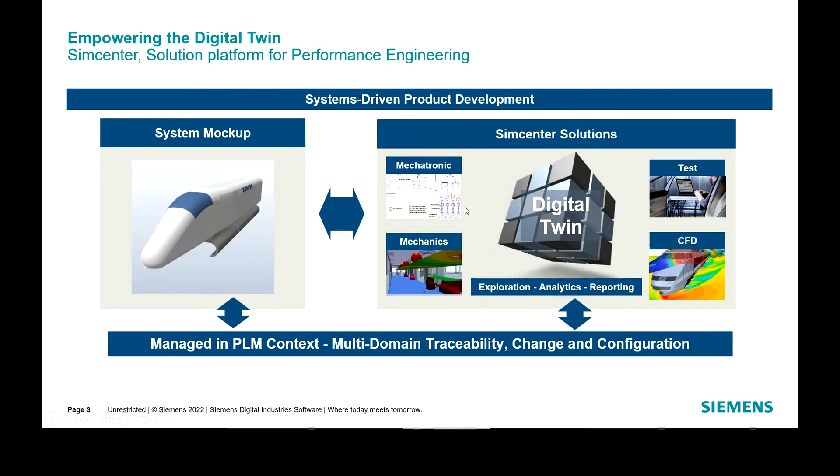But again, today we are going to talk about mechatronic system simulation with our main tool called Simcenter Amesim. Simcenter Amesim is an integrated system simulation solution which allows engineers to simulate and optimize mechatronic system performance. It consists of ready-to-use multi-domain physical libraries, but also industry-oriented libraries, and I will show you some of them today. Some are dedicated to transmission and vehicle dynamics, which will be used today, or batteries and electric machines for the webinar next week, and a dedicated library for heating, ventilating, and air conditioning systems, which is the purpose of the webinar in two weeks.

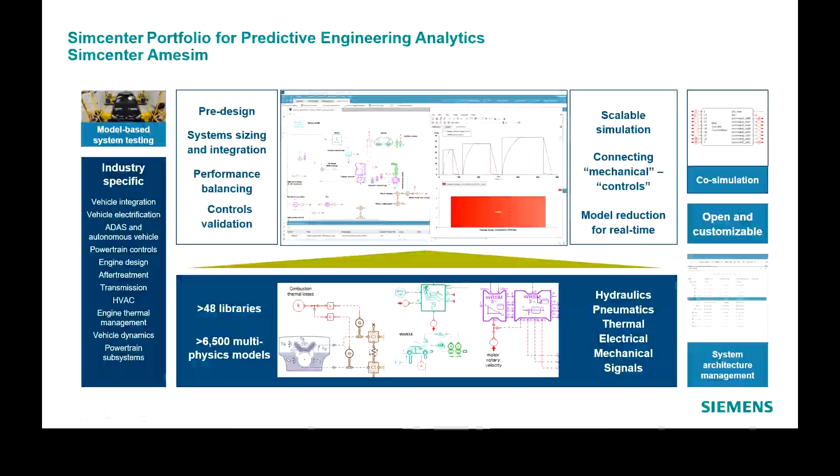So Amesim is an open environment that can be integrated into enterprise processes and can be coupled with major CAE tools and control software packages, can interoperate with functional mockup, and be connected with other Simcenter solutions. Again, today the focus will be on mechanical simulation, and I would like to use some user applications on pantograph simulation, braking and suspension simulation, and the mechanical dynamic driveline. The presentation will be based on customer case presentations as well as live demos.

So let's start with the first topic: braking, suspension, and also pantograph. System simulation can support the design of these systems by supporting the evaluation of static but mainly dynamic performance of the braking system, the suspension system, the pantograph system. It allows you to evaluate new architectures at a pre-design stage and identify potential gains, what-if analysis, so considering a certain technology of system and changing the sizing of the different components to check the impact on the dynamic performance of the system, and at the same time on its energy consumption, which can sometimes be of interest. Typically for the braking system, of course, a compressor is needed to generate the compressed air required for braking, and it has a power consumption.

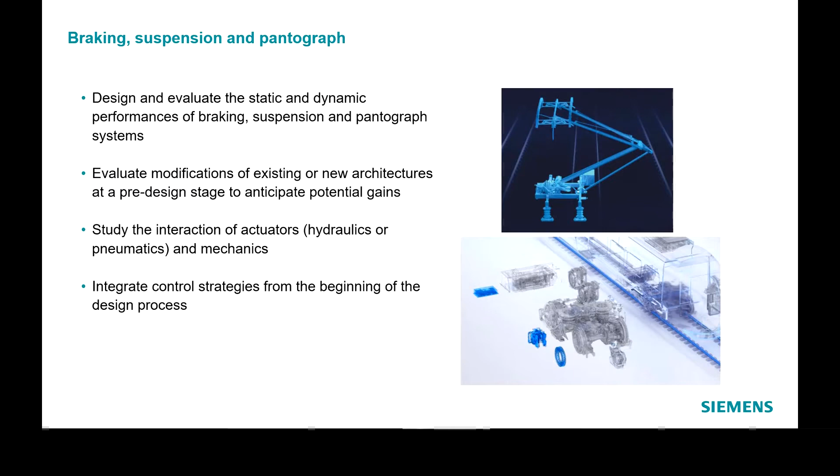What is very important is to have a tool to study the interaction between the different actuators, which can be hydraulic or pneumatic, and the mechanical structure. Most of the time the system is closed loop controlled, and the objective is to provide a simulation platform to couple with control strategies to validate them upfront. We'll show you an example on the pantograph.

Let me start with an application example of Wabtec Faiveley Transports with Amesim on a pneumatic braking system for train. As you can see in the reference, Wabtec Faiveley started many years ago with pneumatic braking system simulation using our tool.

The interest is to compute and assess the braking transient of building the pressure inside the system to brake the train. To have the complete time response of the system from the command to the braking, it's important to simulate the different elements and components of the braking system.

We start not from the compressor, because the main pipe already has 9 bar of pressure inside, but then we have all the pressure reducing valves, the auxiliary tanks, the braking cylinder, and of course the main braking valve, which is presented in the next slide.

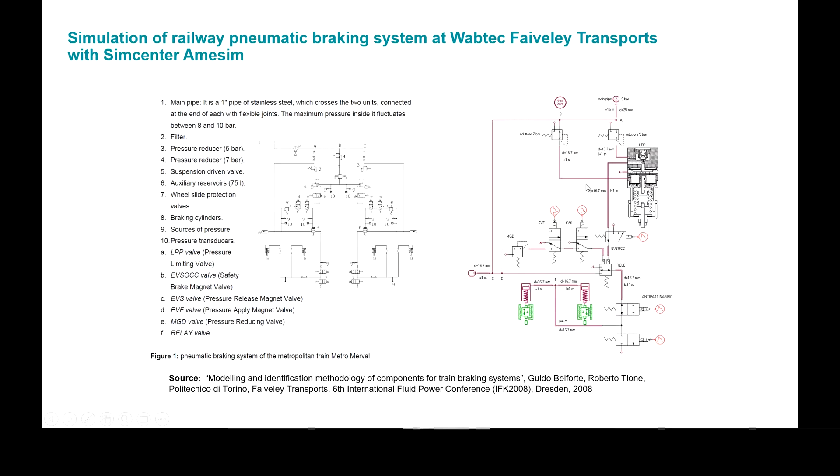Here is the schematic of the pneumatic braking system, and here the associated Amesim model. This Amesim model is created using a specific library called pneumatic component design, which allows entering into the detail of the geometry and technology of each pneumatic component.

Here it's a relay valve, for example, which allows setting the pressure target in the system as a function of a pressure command. In this system you have moving parts: springs, volumes, and valves which open and close depending on the displacement of the moving parts.

All this system is represented here using unitary elements, which represent the valve, the piston, the membrane, the spring. This approach allows modeling and simulating any kind of fluid component. In this case it's pneumatic, but it can also be hydraulic.

As you can see here, we have the model of the pneumatic valve, with validation against experiments.

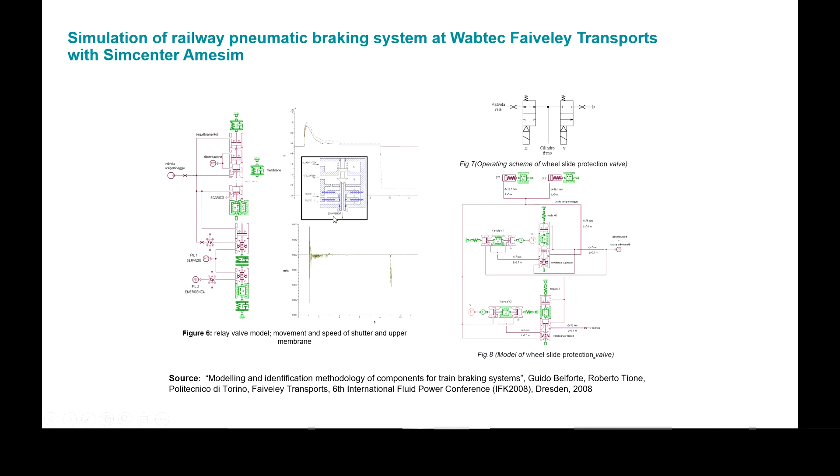The objective of the simulation is to simulate, for in-service and emergency conditions, the time required to generate the pressure inside the system. This time transient is what we want to capture with the simulation model, to estimate how it will be impacted by the sizing of the components or the operating conditions.

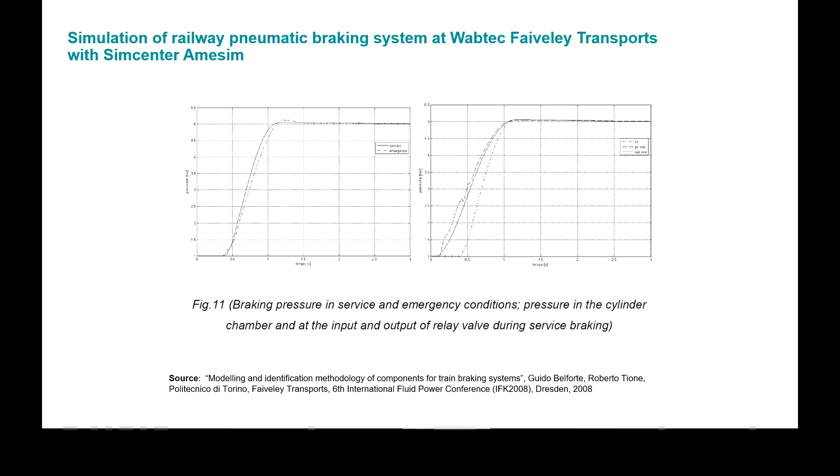Well, that was the first example I wanted to show you. A second example here is on a suspension system for a bogie.

With Amesim we have the possibility to represent the damping system, the vertical suspension and damper. Usually this damping is done using a hydraulic cylinder with various chambers, and this paper proposes an innovative system where the movement of the suspension up and down can be damped.

Instead of losing the energy by damping inside an orifice, this up and down movement can be coupled to a hydraulic motor connected to an electric generator to generate electrical current. That's the objective of the research project here. I can share the paper later if you're interested.

It couples the hydraulic damper with an electrical generator. The Amesim model allows estimating the electrical current generated by this system, given that the system has to be damped — the main function of the suspension is to damp oscillations, and the secondary mission is to also generate some electricity.

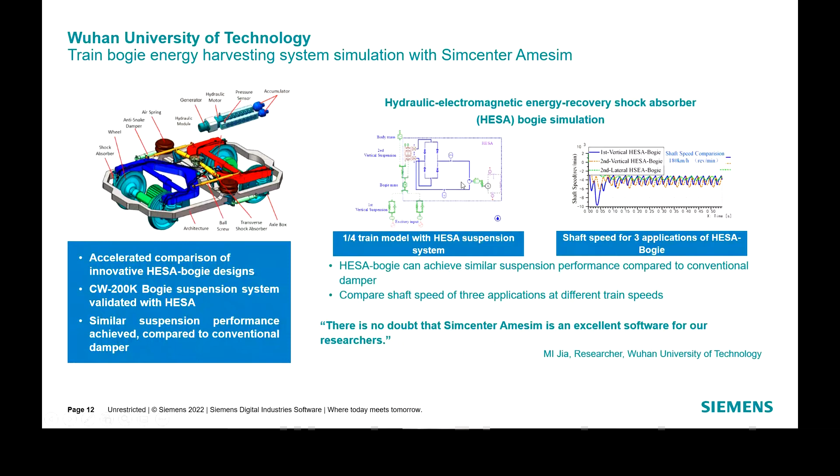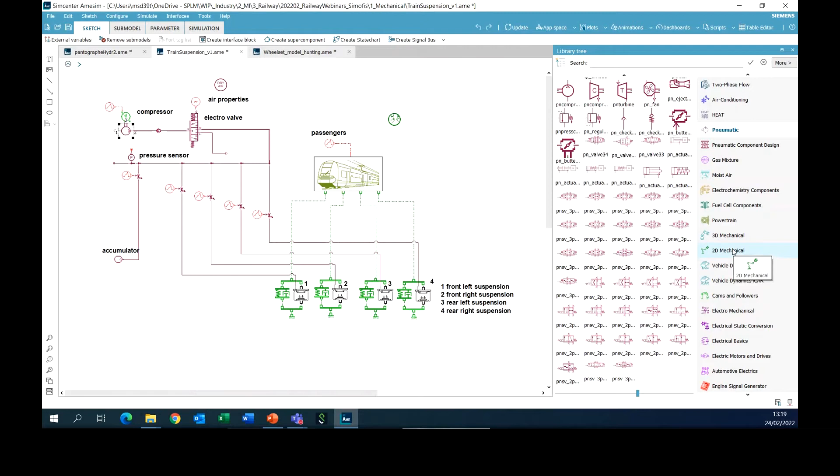And we have used in this example a compressor element, a check valve, an electro valve, and also additional valves to put some compressed air inside the suspension. And here the suspension and the train or the locomotive is represented using mechanical simulation, which is also part of Amesim, in which we have the possibility to simulate either 1D motion, 2D motion, or 3D motion. In that case, its elements are part of the 2D mechanical library. We consider only a 2D motion of the train.

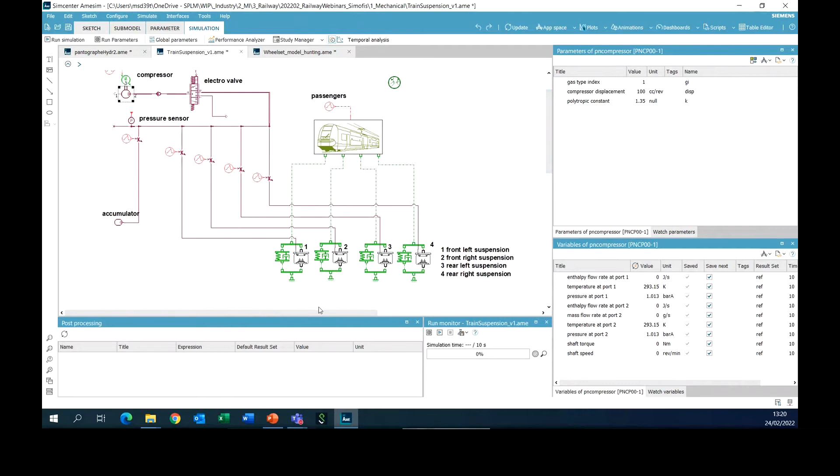Okay, so what is the scenario we want to simulate here? The suspension you see on the four wheels is based on a classical spring. But we also add a pneumatic spring, which allows to compensate the additional weight you have in the train when you have passengers going up and down and going in and out. This pneumatic suspension allows to maintain the height of the train relatively stable.

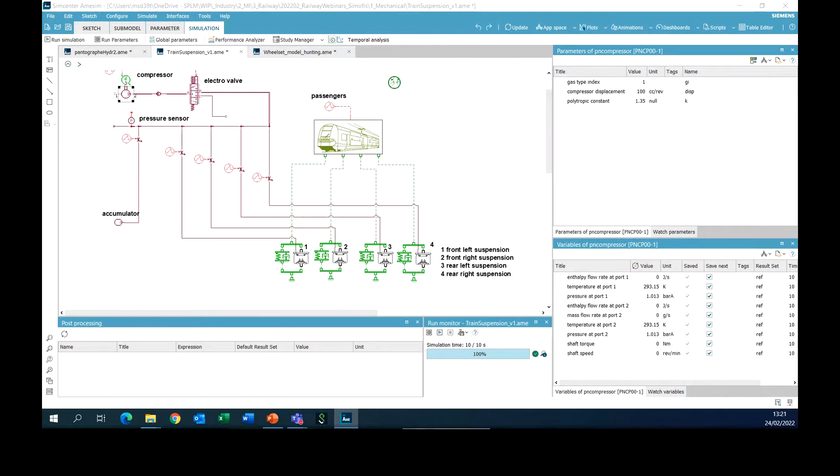So if we look at the simulation, let me run the system. It's very fast because it's the objective of system simulation, and in that case the model is a first level of model with not a lot of parameters and dynamics inside. What are we simulating here? We are simulating the fact that after, let's say, 3 seconds of simulation, we add something like 1 ton and 600 kilograms, let's say roughly 20 people inside the train. And of course, due to this additional weight, the springs here are compressed, and you have a displacement of 10 millimeters of the body of the train.

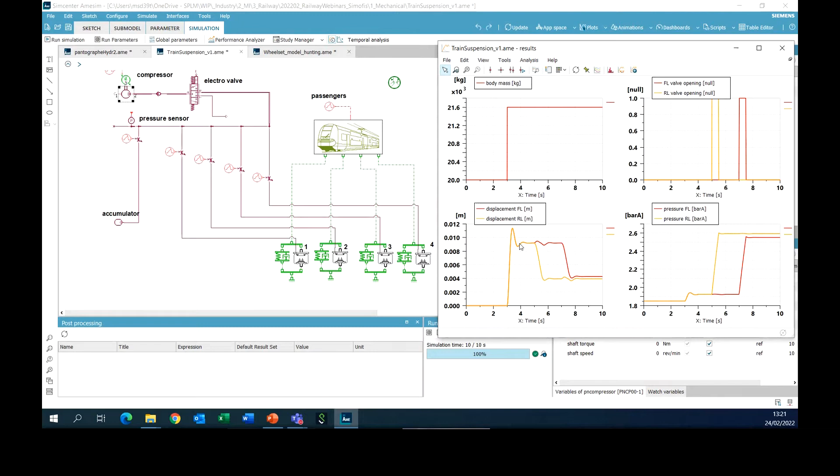Trying to compensate this displacement, we can put some compressed air inside the chambers. So what we do here typically is, with the yellow curve here, we open the valve to put pressure inside the rear left wheel, and as a consequence, the pressure increases in the rear left wheel, and the train lifts a little bit to compensate the additional weight we have in the train. And the same after 7 seconds, we put pressure in the front wheels, in the front suspensions, and we have the same characteristic.

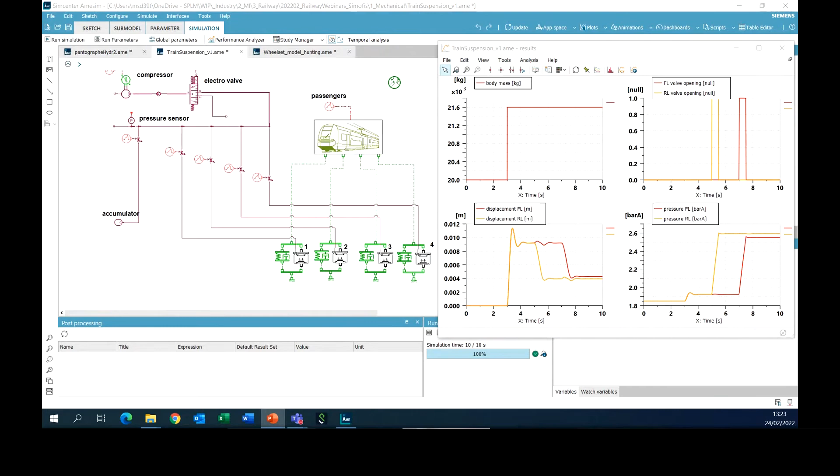So that's an example of what can be done using Amesim, typically to size the different elements of the system, but also to test some control strategies. Okay, that was the first example. Then we come back to the presentation. Oops.

Yeah, here. The second example is on a pantograph. The example I am showing you here is the result of a research project done by an Italian university, again some years ago, so as to prove that our technology is very mature and used for many years in the industry. So here it's an example of active suspension. The objective here is to control the actuator damper in order to maintain a contact force as constant as possible, because when the train is riding, you have the wires which are not at the same height, and then the system has to compensate this height and maintain the same constant force on the wire.

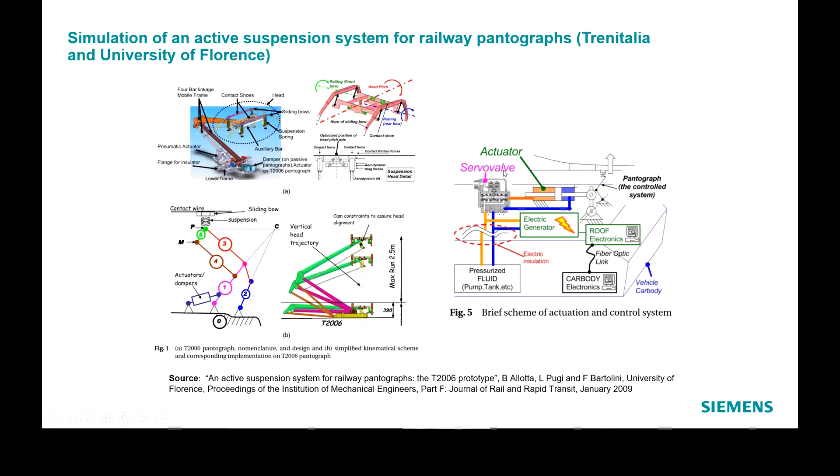Okay, so in this research activity, they developed a control system based on a hydraulic actuator and a Moog servo valve. They wanted to control it in order to maintain the contact force. And here it's part of the model on the hydraulic side, so the hydraulic servo valve and the hydraulic piston. Then the pressure signal and the force signal are used in order to develop the control strategies. And all the motivation of the paper is to explain the control strategy which has been developed.

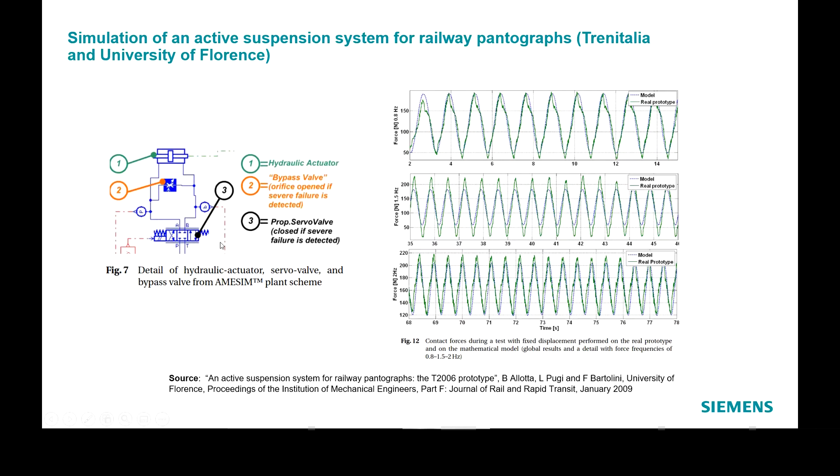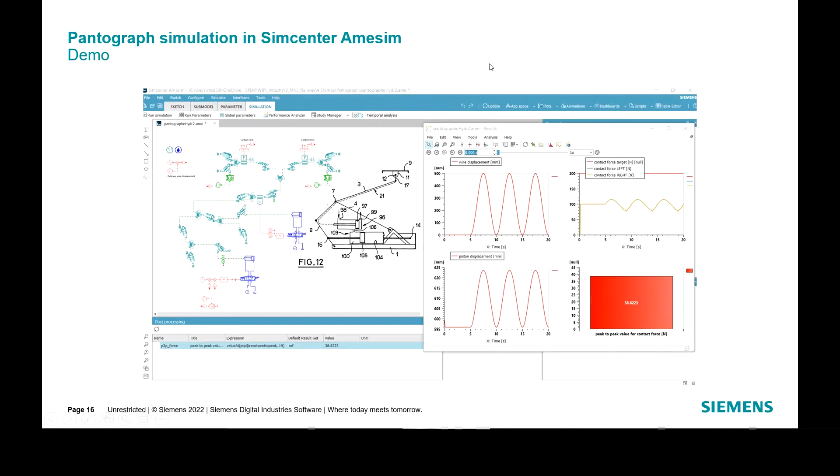Okay. So again, it's another example of usage of Amesim for pantograph design. And let's say, starting from this paper, we have tried to create on our own a simulation model which represents more or less what has been done by this university. So let me go now to Amesim again. We can close this one.

Okay. So here, you recognize the same icon as in the paper. So there are icons included in the hydraulic library, which are more or less the same kind of elements as you can find already in the pneumatic one. And here the mechanism has been created using the 3D mechanical library.

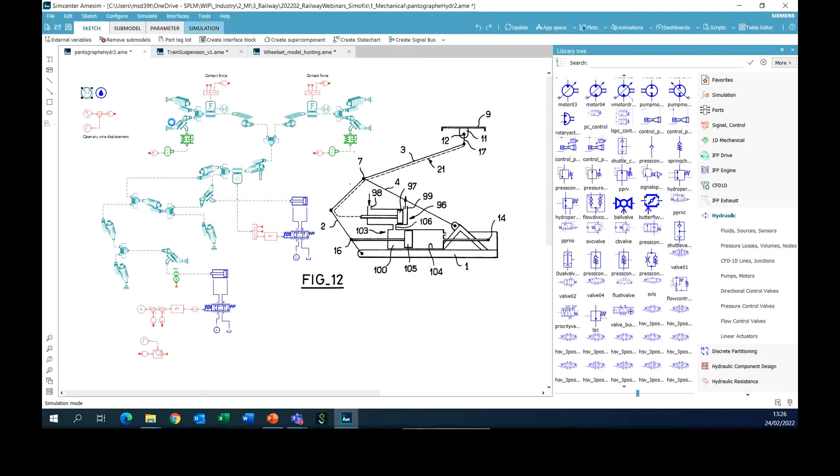And of course, in that case, the model can be created manually, or it can be generated automatically starting from CAD. There is some documentation inside Amesim explaining the process of generating a 3D mechanical model starting from the CAD. But of course, once the model is created, we also have access to an animation. In our case, the animation here.

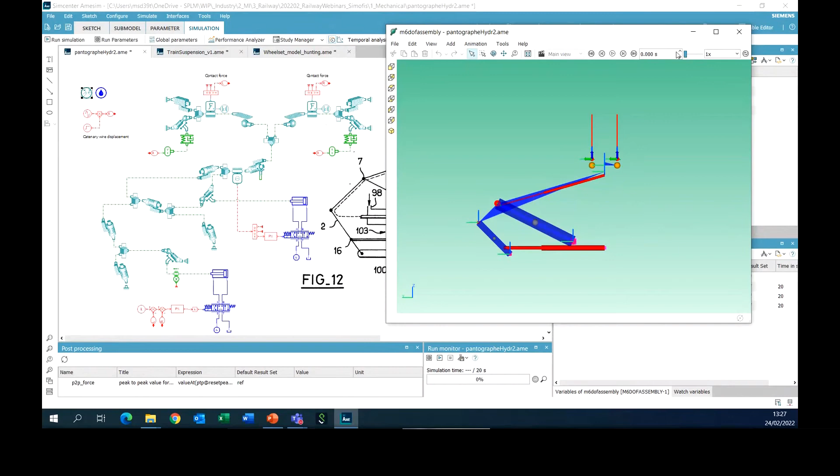So we did not start from the CAD. So let's say the bodies represented are quite simple and can be automatically generated starting typically from the attachment of the body with the other bodies. Okay. So what are we doing here?

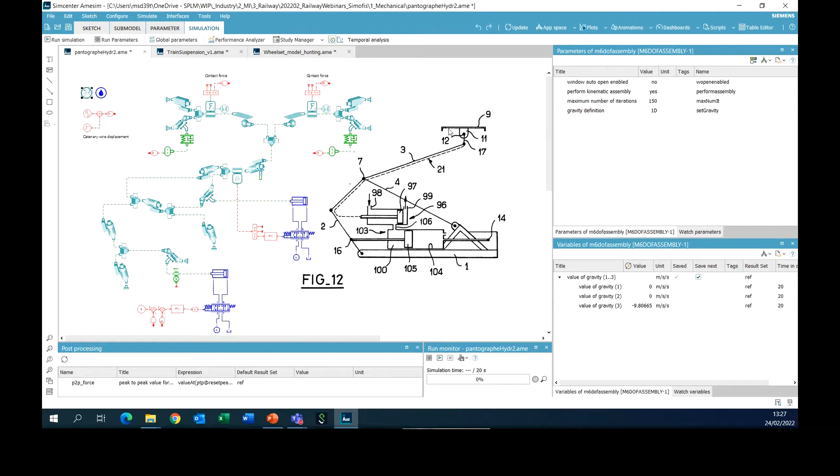We have one main actuator here, whose purpose, you see here, is to push on this arm here, and then to put the pantograph close to the wires. Okay, and there is a second one, which is used here to maintain the pantograph in a horizontal position. Okay, so let's first concentrate on the first actuator.

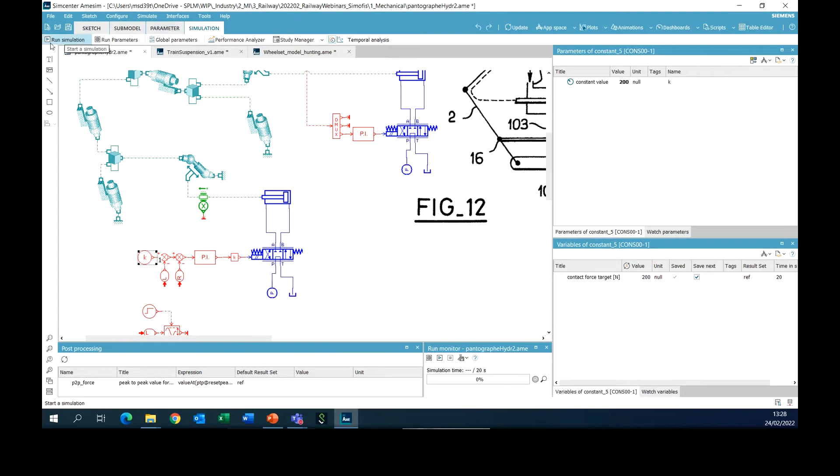So what we do here is that we define a target contact force between the pantograph and the catenary, and then we control the position of the cylinder in order to reach this value. Okay, so let me run a first simulation. Okay, you see the simulation running here, and here we can plot the results.

Okay, that's done. Maybe I can redo it just to show you that you also have the possibility to update your simulation results during the simulation. So as you can see, we have an initial phase during the first 5 seconds where the train is not moving. So we have an initial displacement of the piston to compensate the gap between the pantograph and the catenary, and to reach the contact target.

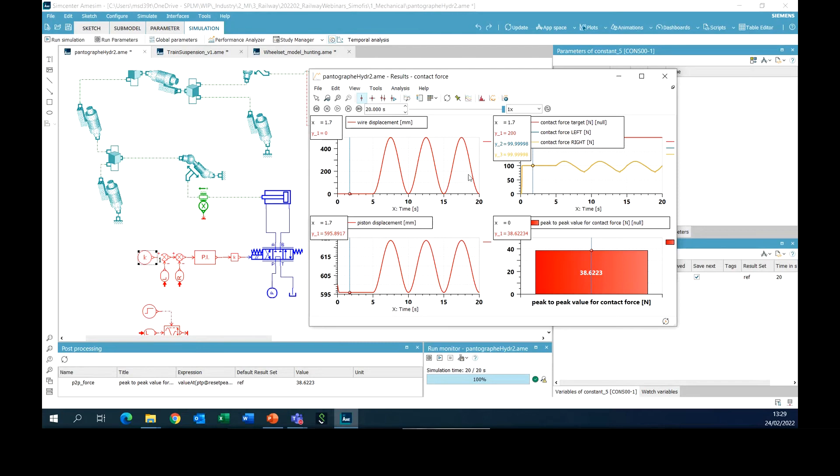So the contact target is 200 Newton, and so we have 100 Newton on each of the points of contact, because of course we have two catenaries, which are represented here by one body and the other body. Here you have the mechanism representing the pantograph, and here the modeling of the contact between the catenary and the pantograph.

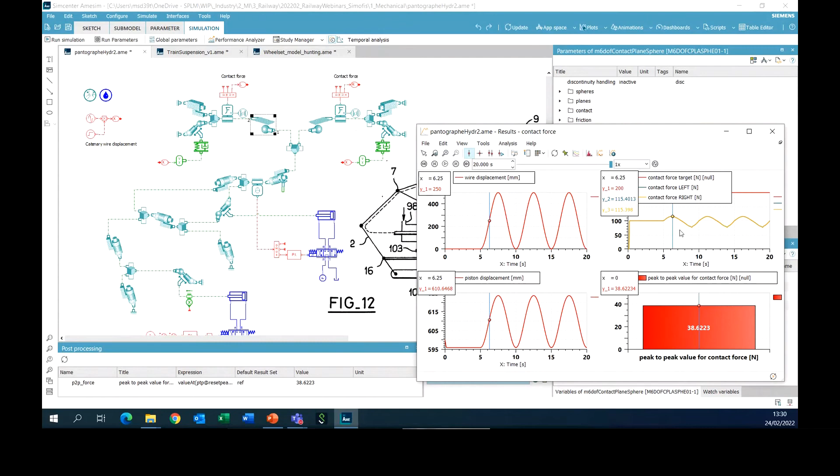So we reach the stabilized position, and then due to the oscillation of the catenaries, which are here more or less 0.5 meter, we see that the piston at the bottom here is moving as well, in order to try to compensate for the displacement and maintain the contact force as stable as possible. And we see here, with this set of parameters, we have a peak-to-peak value for the contact force, meaning between the minimum and the maximum value, of 38 Newton.

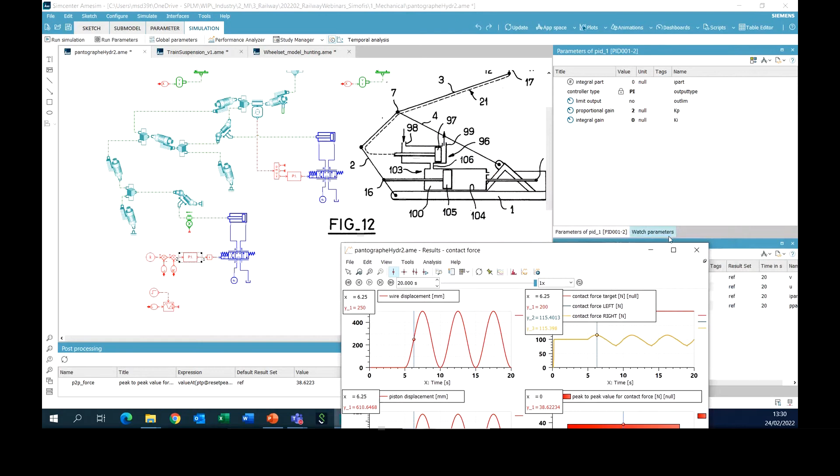Okay, one can say that's good, but let's try to do better. How to do better? We can do it by trying to change some sizing of the system, but we can also try to achieve this with control strategies. Here, in this example, the controller is a PI controller with a proportional gain and an integral gain. So the default parameters are 2 for the proportional gain and 0 for the integral gain.

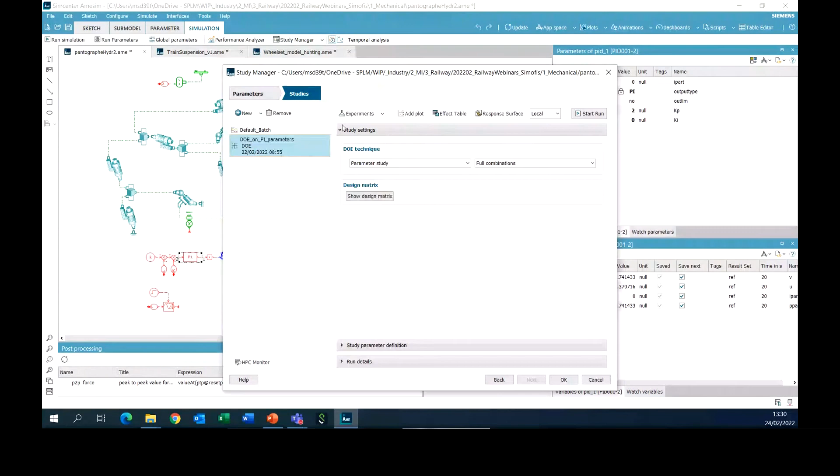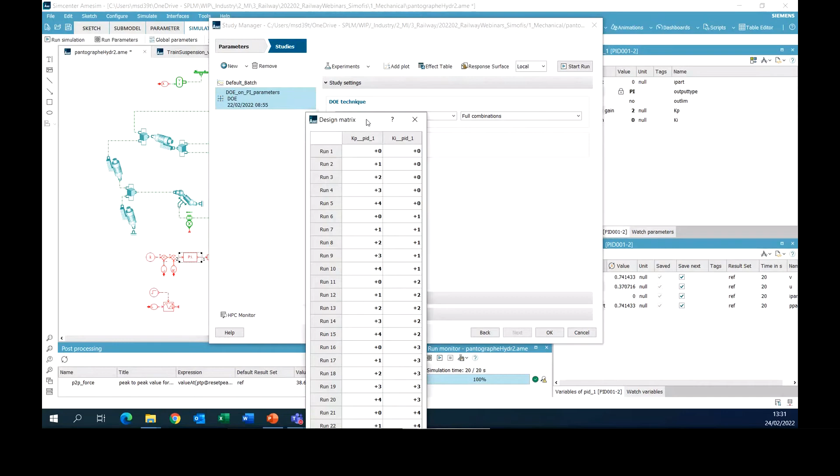What can be done in Amesim is to perform a design of experiments with different parameters. So we can set here parameters for the proportional coefficient and for the integration coefficient with these values. We have defined that we want to do a full combination. That means that we will do 25 simulations with all these different parameters. I will not launch the simulation because it will take maybe 3-4 minutes, but I open the results directly. Okay, and the results are the following.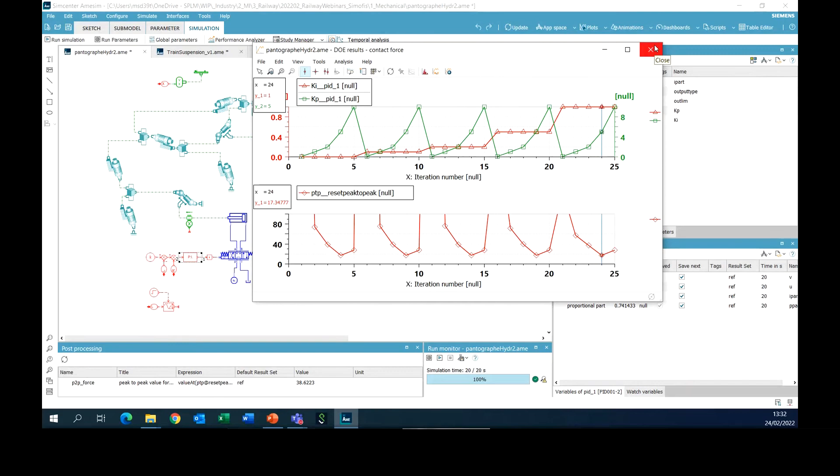proportional gain can do the job in this example. So it's an example of how to use the design of experiment function of Amesim to find an optimum design—in that case, not an optimum design, but more an optimum control. Okay, so that was the second example I wanted to share with you.

Let me come back to the presentation now.

So now let's talk about driveline mechanical dynamics. What can be done in 1D system simulation is the following: trying to study oscillations between the power sources of the train. It can be an electric motor, a diesel engine, or a mix. It can also be a hybrid vehicle, but you most likely always have some mechanical transmission, mechanical links between the power source and the wheel set. This transmission can generate vibrations due to the fact that these mechanical systems are in fact a set of inertia, stiffness, and dampers, and by nature have some natural frequency, and we have to check that these natural frequencies are not excited by the power source.

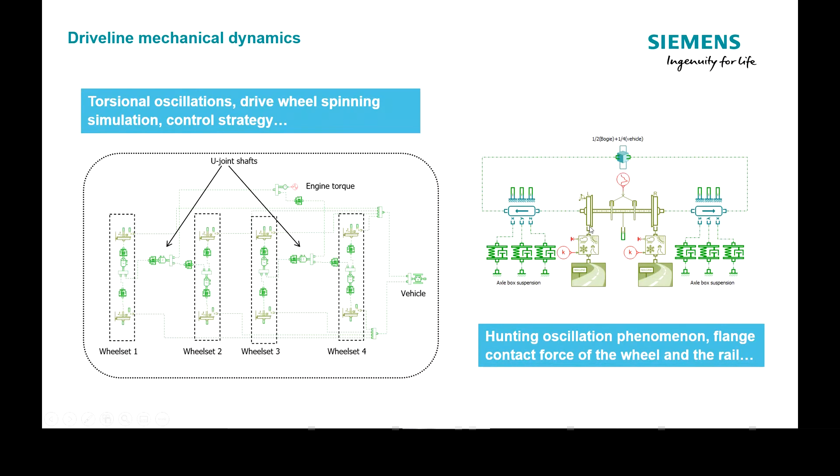We also have the possibility to simulate hunting oscillation phenomena. I will dig more into it in an example later on, but that's basically due to the fact that you have a conical shape of the wheel. You have the rail, and so you can have a displacement in this direction, and these vibrations can cause some bad feelings, and also some high force during the contact of the wheel and the rail. So we will have a look at an example just after.

The first example here is more on vibration analysis on the railway drivetrain. This is an example from Hyundai Rotem in Korea, which has also been using our tool for many years for different kinds of applications—mechanical applications like this, but also electrical applications, fuel cell typically. The objective here is to understand if you can have some bad vibrations inside the mechanical driveline between the electric motor, the motor reductor, the U-joint, and different coupling elements we have inside the driveline. All these mechanical structures have their own stiffness—even if they are high stiffness, they are not fully rigid. And that's important to understand if we can have transmission of vibration from the motor to the wheel.

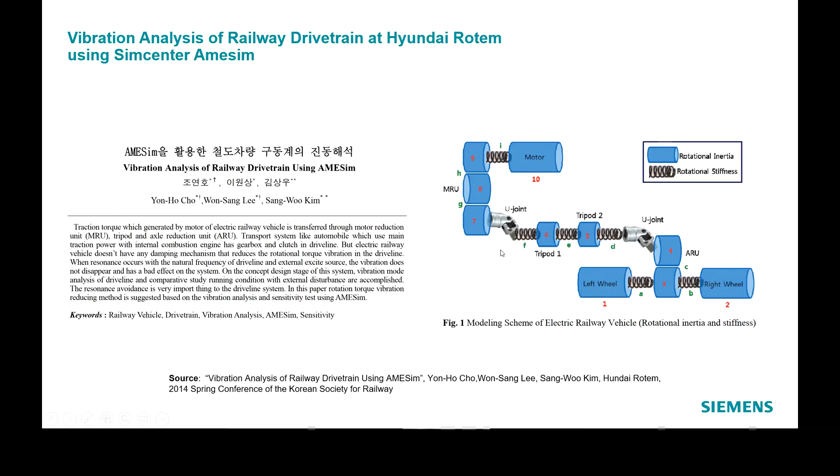Again, the natural frequency of the driveline depends on the sizing of the different shafts. It also depends on the gear ratio inside the system, due also to the U shafts, the universal joints, and so on. We consider not only the stiffness of the different axles and arms, but also the stiffness of the contact between the teeth inside the gearbox. This can also be important—they are very high frequency, but still, if you have an electric machine able to excite very high frequencies, it's important to check there are no resonances inside the system. So again, we have our mechanical rotary model here, connected to the wheel set and the vehicle.

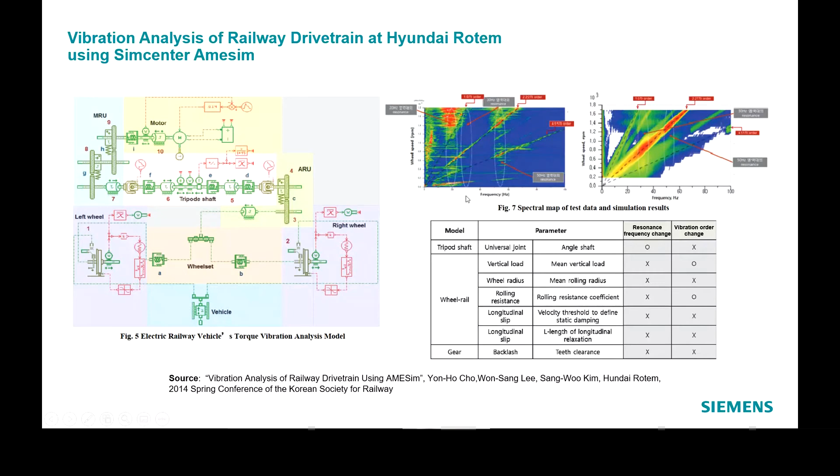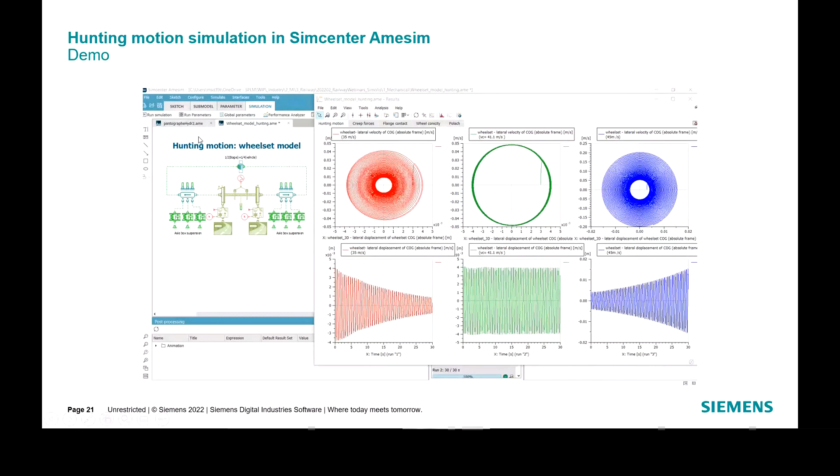Now I will show you a last example with hunting motion, directly with Amesim. Let me share again - yeah, the Amesim model.

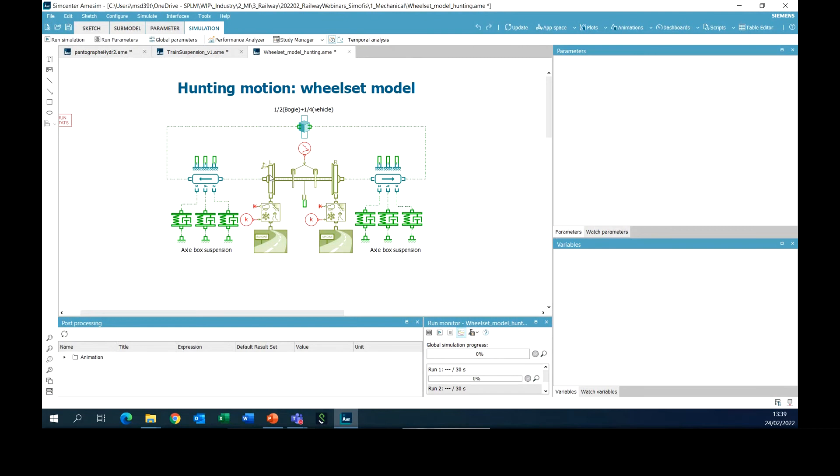Here the model is using a specific wheel set model element, which is part of the powertrain library. You see we have different elements, different coupling elements - you remember maybe the U shaft, where is the U shaft? Oh, it's not inside this category. Anyway, we have all the possibility to simulate the gears, complex gearbox as well with planetary gear trains and so on.

Bearings as well, because it can be important to simulate the losses due to the bearing elements. And we have different kinds of vehicle elements - like this, where we have traditional, let's say, automotive or truck vehicles with pneumatics and tires.

But we also have the possibility to simulate wheel set and rail wheel contacts. By the way, because we have also classical tires, we have the possibility to simulate not only trains but also metros with tires. So in this example, what are we considering?

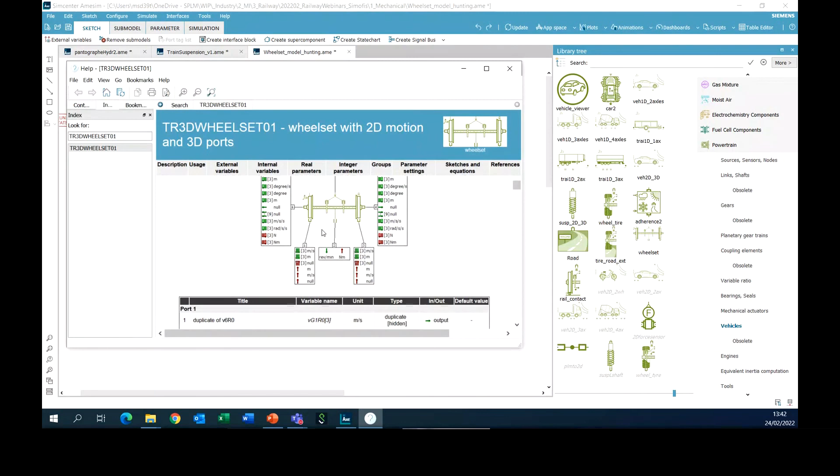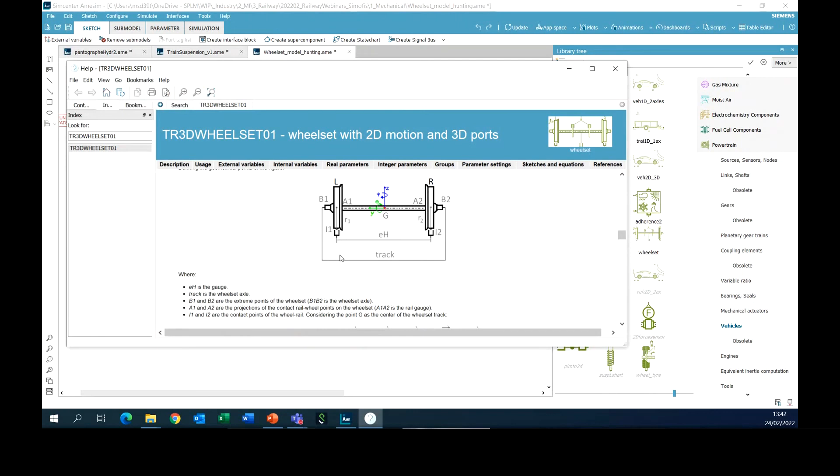If we look rapidly into the documentation of the elements - I wanted to show you that we have complete documentation for all the elements that are part of Amesim, which explains all the physics integrated into the model, and explains how the parameters correspond. Here, for example, we have some distances which are explained. Basically, in this example we will concentrate on the displacement on the y-axis here.

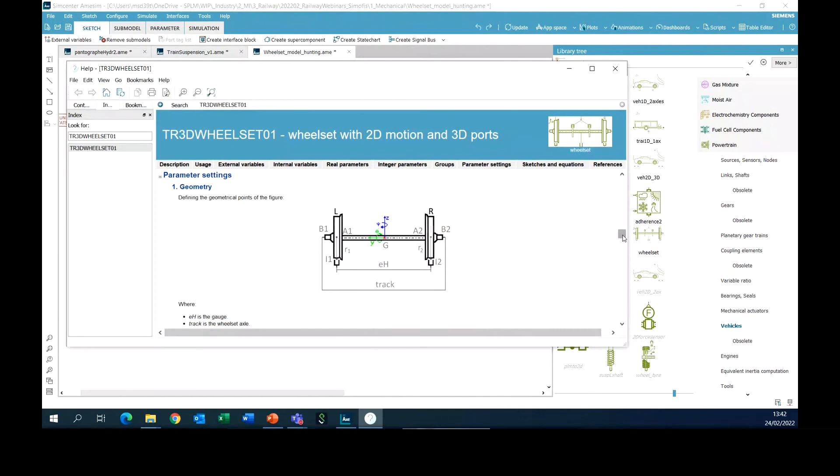Function of the speed of the train, and then we will see the possibility to have a look at the contact force generated by the contact between the rail and the flange of the wheel. Okay, so let me come back to the Amesim model.

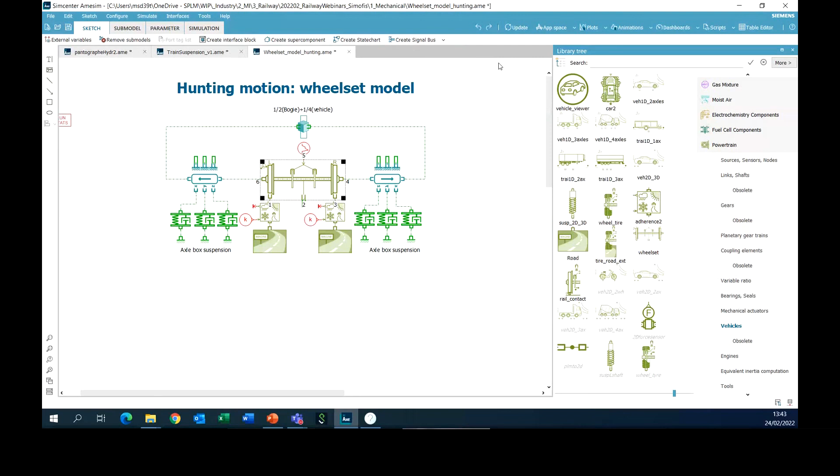I'll plot some results. Okay, here they are. So what we can see here in red corresponds to this hunting motion, in right and left, for an actual speed of the train of 35 meters per second. We see that in that case, if we give an initial lateral velocity, this motion is damped.

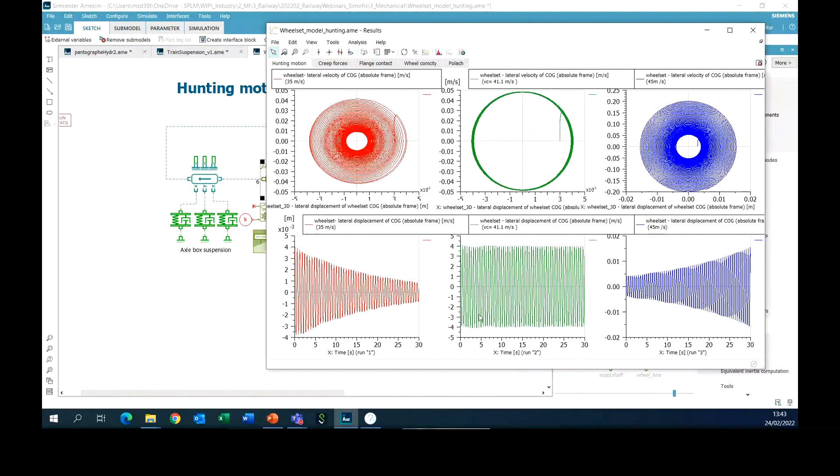When we are at the critical speed of 41.1 meters per second, we see that there is no damping. We maintain the displacement at the same speed, at the same amplitude.

And if we are higher than this velocity - so let's, for example, simulate 45 meters per second - here it's really critical because you see that we have a divergence and the displacement increases.

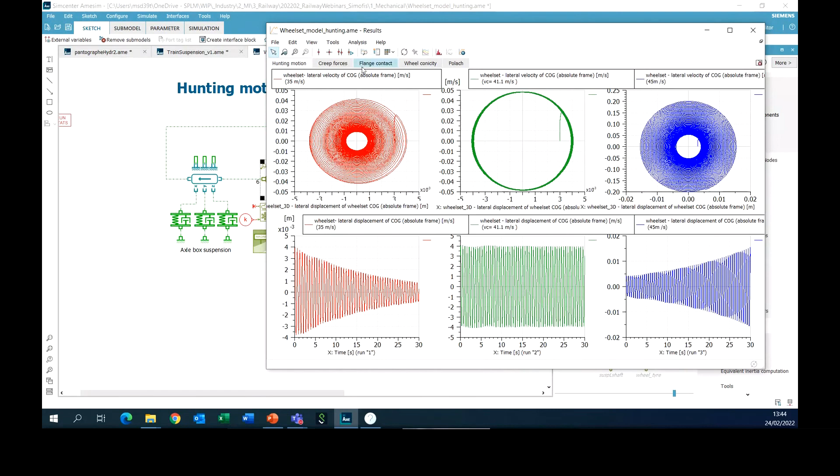Of course, this is something we want to avoid, or at least if we are not able to avoid it, we have to put a flange after a certain displacement of the axle in this direction. But because the system continues to oscillate, we will stay under a certain displacement, but each time we reach it, we will have a contact between the flange and the rail, generating forces that can be estimated with the Amesim model.

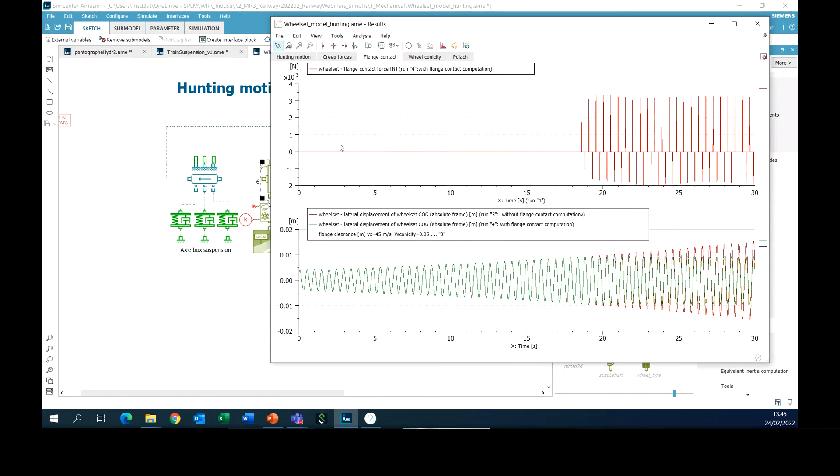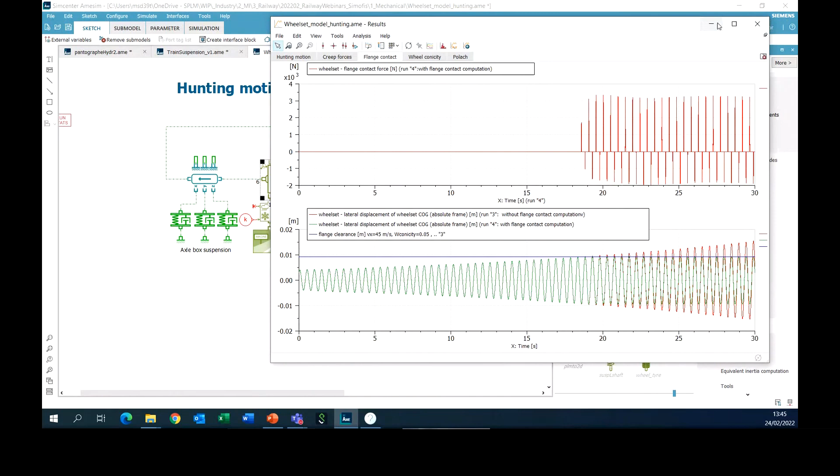Okay, so that's an example of some mechanical simulation which can be done using Amesim. There are many more examples, but I wanted to give you the possibility to share your questions, maybe ask about the examples I've presented, and maybe also ask about some additional examples I've not shown today.